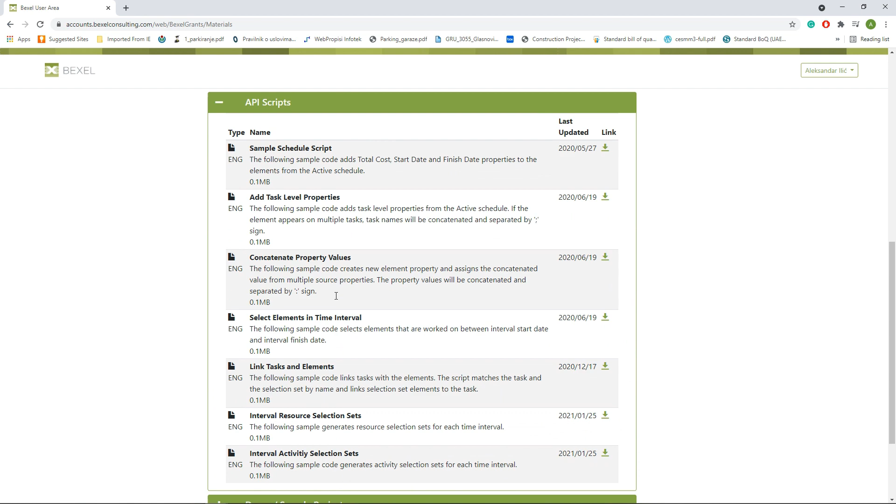All the way to demo sample projects, we offer 4 different types of buildings, of construction projects, from different authoring tools, of different types and different scale, and all of these projects are accompanied with detailed educational documents and step-by-step exercises that will help you learn your basic workflows in BEXEL Manager.

Besides this, there's also a Webinar Materials tab, where you can find exercise materials and models from previous free educational webinars, as well as exercise materials, models, and all import data for this webinar. And at the end, the Databases tab includes various classification systems ready for import into BEXEL Manager.

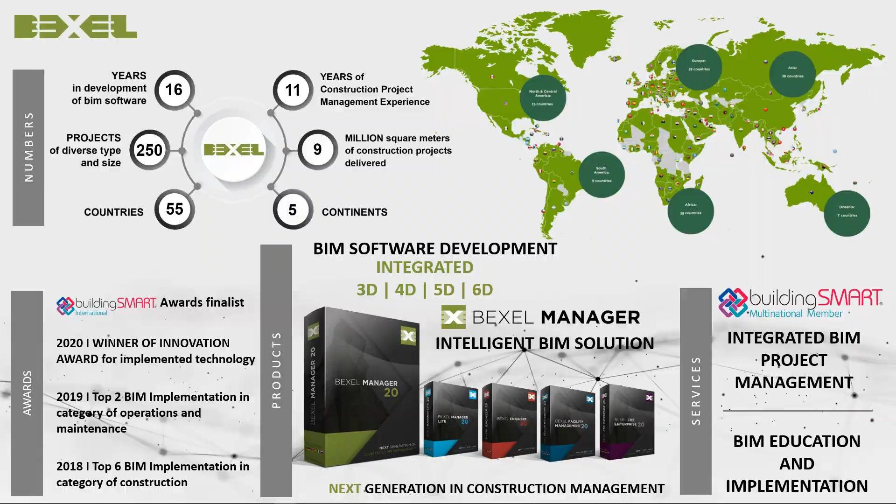Our software solutions and consulting services are used on numerous projects by big, well-known companies around the world, and we are proud to say that we gain trust from so many renowned clients. Last year we won an Innovation Award at buildingSMART annual competition, and we are very proud to be recognized as leaders in innovation in the field of BIM.

Just a brief explanation about our approach to BIM. BIM is often considered as a series of separate tools or processes specifically tailored for a certain part of construction management or for a specific project lifecycle phase. This often brings to a conclusion that BIM implementation is complicated, expensive, and requires extensive training and resources.

Because of this, we saw a need for a new approach to BIM implementation. We saw a solution in establishing BIM processes and a BIM platform in such a way to be open and adjustable for different requirements and project types.

We wanted to ensure that the core of the BIM model's role on the project is to be a reliable single source of truth for all participants, to encompass all relevant information on the project.

In order to succeed in this, we envisioned our platform as an integrated BIM solution that will allow you to manage your project through the whole life cycle, to integrate information from different phases and different stakeholders, and to focus on the big picture and benefit from an integrated project database.

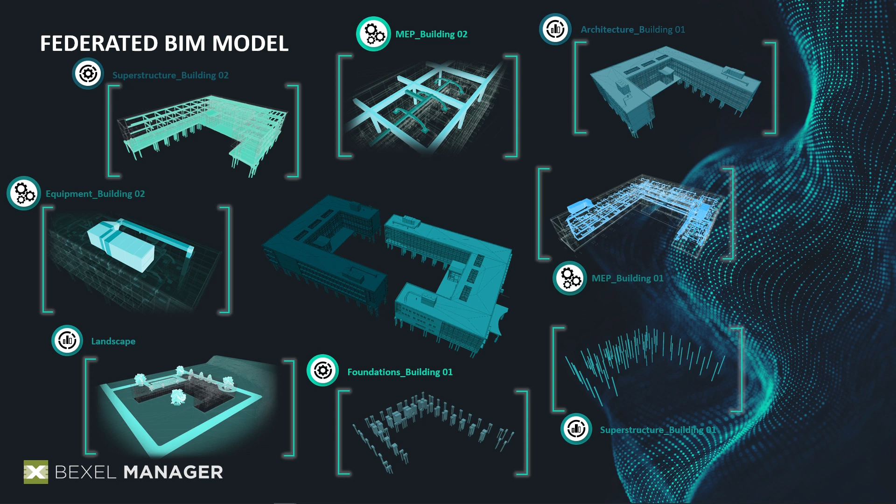Thankfully, the majority of software vendors today are dedicated to the Open BIM approach. In cooperation with buildingSMART International Organization for BIM Standardization, the open IFC format is developed and widely accepted.

We're gonna start our live demo with model federation. So basically we're gonna just create a new project within BEXEL Manager. We're gonna name it Demonstration Models. We're gonna name version V01 for our start model.

We're gonna choose multiple sources. Then we're gonna just select 3 IFC files, one for architecture, one for MEP, and one for structural works, and click OK.

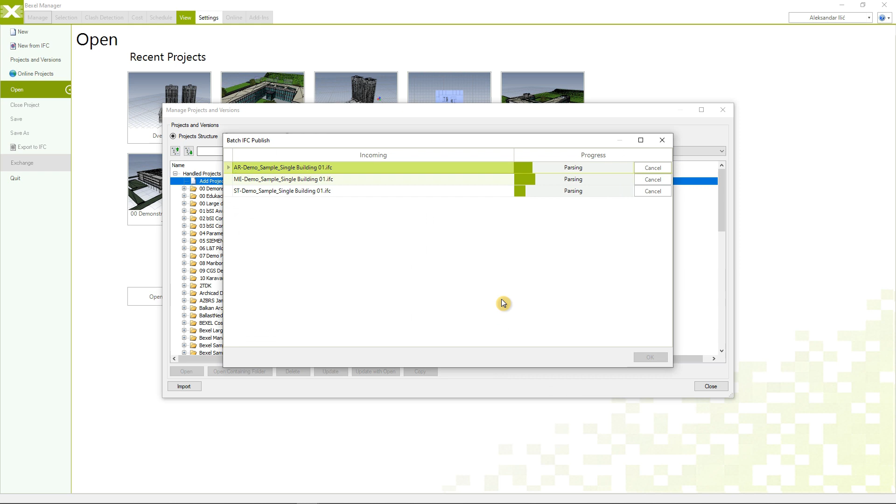The software will just merge them into one federated BIM model, including all the geometry and data layer of the said sources. Now we can open our federated BIM model.

We have established our federated BIM model. All different sources are now integrated into a single central BIM model.

But what makes the difference between a simple 3D model for visualization purposes only and a BIM model is the so-called information layer. So besides geometry, the BIM model contains an extensive data layer.

So the first step in federated BIM model preparation is to organize this information and prepare it for the next phase. First of all, we need to check the spatial and data structure of the model.

For this, in BEXEL Manager, you can use the Building Explorer tab. Here there are predefined model organization functionalities that will organize your BIM model by element category and family, spatial organization, systems, and workset structure. So basically you're able to control your model based on these predefined organizational schemes.

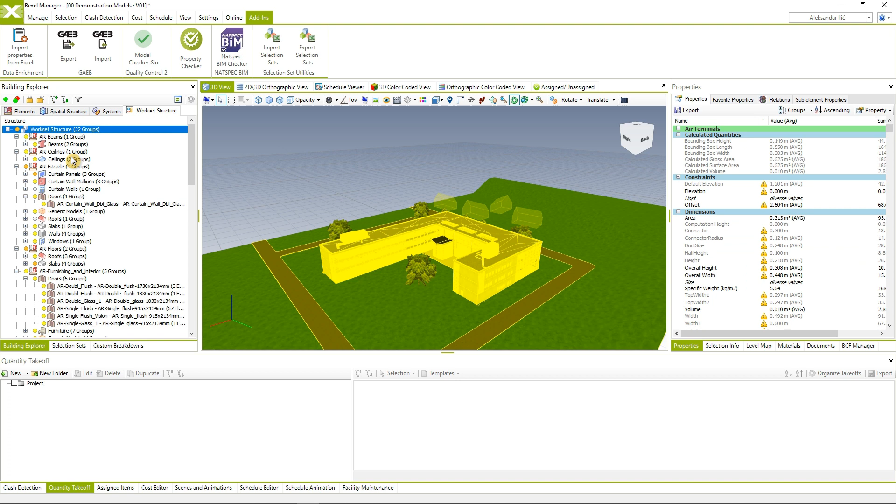So if we go quickly through these options, we can see what level of information we have and what is the basic structure of our model. But for a more detailed analysis, we would need more refined, more customized project organization.

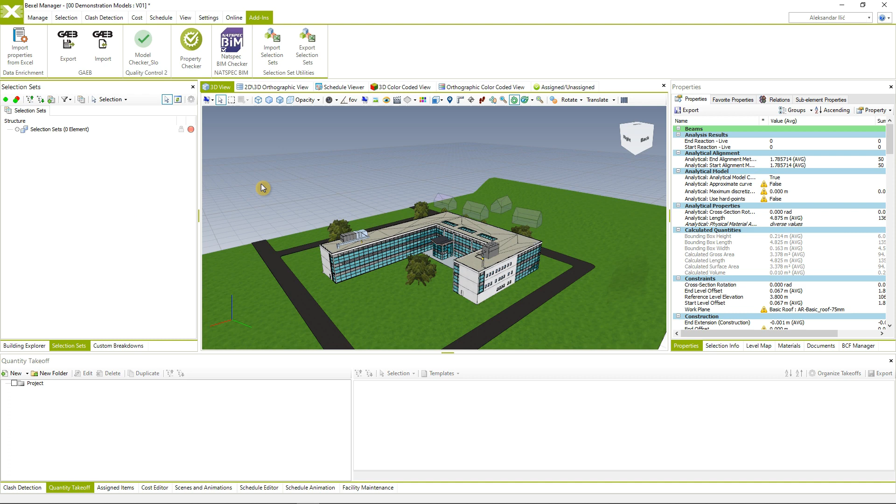And to achieve this, we can use selection sets. Selection sets allow the user to group and organize elements. So you can manually create groups of elements or use rules and define so-called smart selection sets that will group elements according to certain rules or properties.

Now we can see one simple example. So I can just select these few elements and create a test selection set. These elements will be actually stored in this selection set. Or I can create a smart selection set by simply defining the rule.

Let's say we're going to group all the elements that are of a certain category. Let's choose walls. And I can simply create the smart selection set.

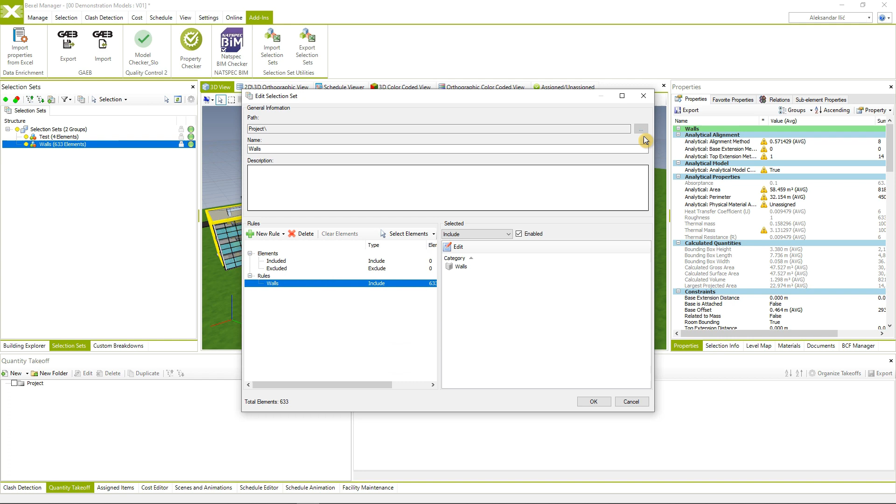The difference between the smart selection set and simple selection set is that even when you update the model, the smart selection sets will be updated according to the rules defined in the selection set.

But honestly, creating new customized selection sets for every new project is a time-consuming task, since if you think about it, rules of model organization and procedures are more or less something that can be predefined at the level of a team or at the level of a whole company, actually.

So this new feature of BEXEL Manager that we'll present today allows you to establish your knowledge base, a set of predefined templates for model organization and control that could be easily applied on every new project and exchanged between teams.

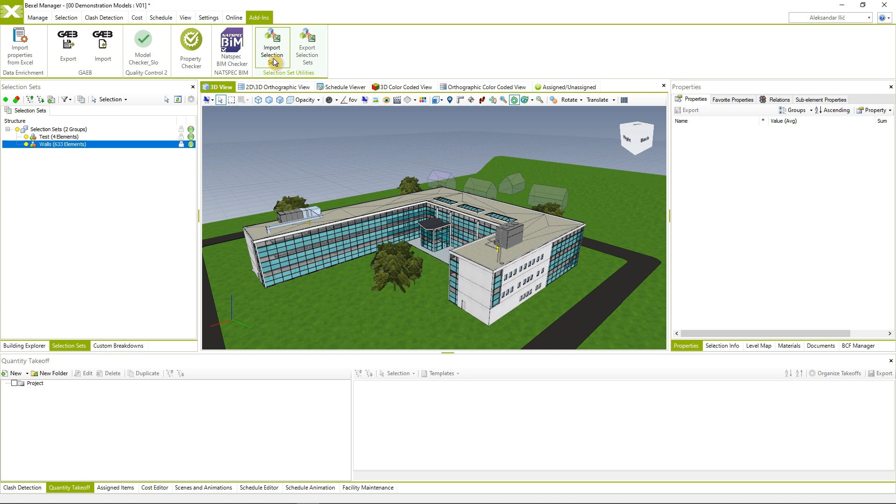With a simple add-in, the user is now able to import smart selection sets defined in an Excel spreadsheet.

Now we're going to present some examples. Since we have a start model without selection sets, we can start with model organization rules that will identify different sources. In this example, rules are established to identify abbreviation and source names - AR for architecture, ME for MEP, ST for structural, and so on - and automatically prepare separation of model elements by work packages based on the source file's naming convention.

Of course, the system is completely flexible, so you can set your own naming convention as well.

For detailed information about how to establish the rules and how to prepare the table for importing the selection sets, you just need to click on the help page and you'll find all the detailed information on what you have to do. Now we're going to import selection sets.

Okay, selection sets are now imported. As you can see, we can now control the model by simply turning off or on parts of the model based on the source name.

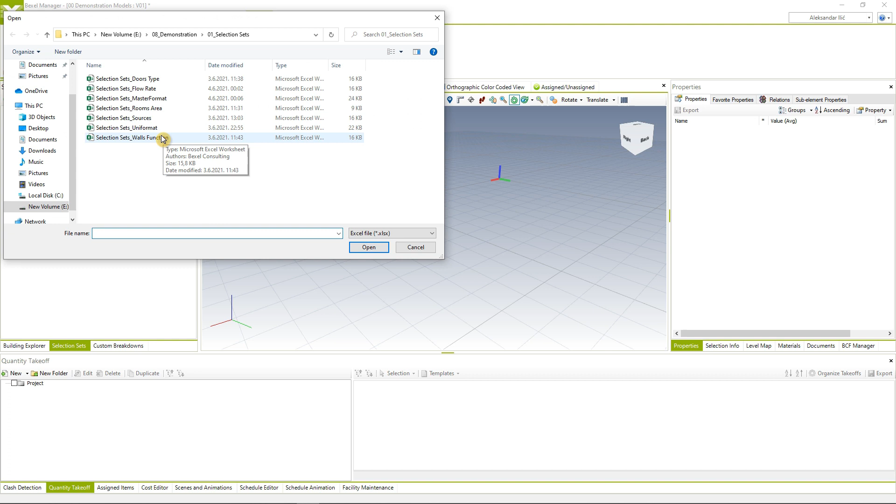There are also some additional simple examples like this one, which actually organizes the walls into bearing and non-load bearing walls. So you can separate the wall category elements by this specific property, and you can easily select them and distinguish them in the model.

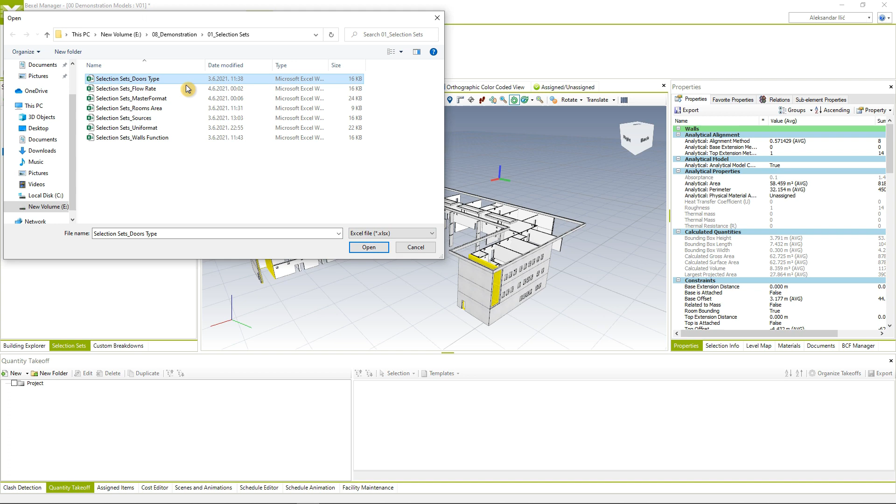Or another very interesting predefined selection set template, which organizes doors based on the property named swing direction. So basically you can set a selection set template that will organize all the doors on the project based on the property swing direction. If we isolate it, we can see that we can easily identify it.

It's not so impressive on this small scale model, but it could be very helpful in a bigger federated BIM model.

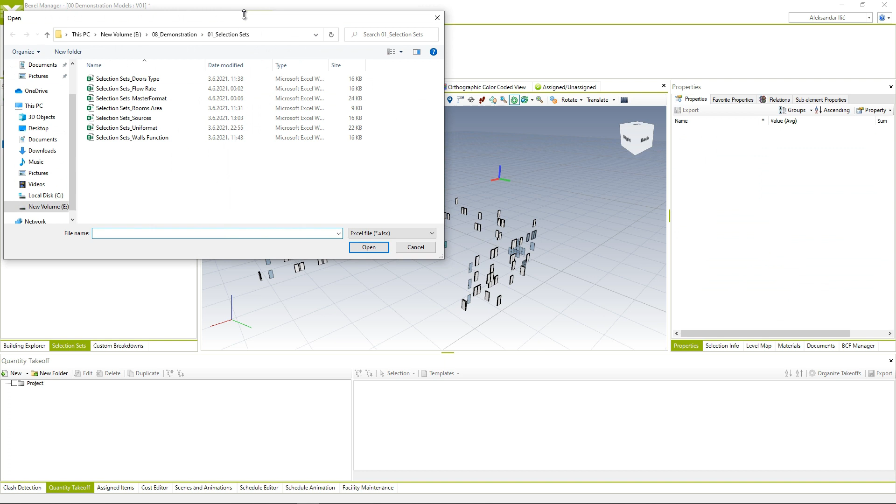Another interesting example is this selection set template, which organizes or sorts all the spaces in the model into groups by square meter area. It has a bit more complex rule, which includes the category and the area spaces range. So if we import it, we're going to see all the space elements or rooms in the model actually separated into groups from 0 to 10, 10 to 20, and so on square meters.

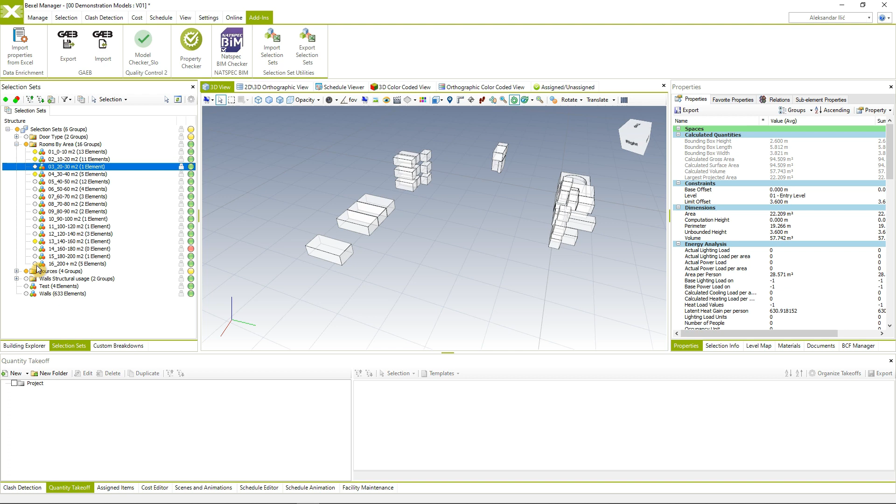So we can easily identify different groups of spaces based on their area.

And this is just an example of how this feature could be utilized for various spatial analysis and project control.

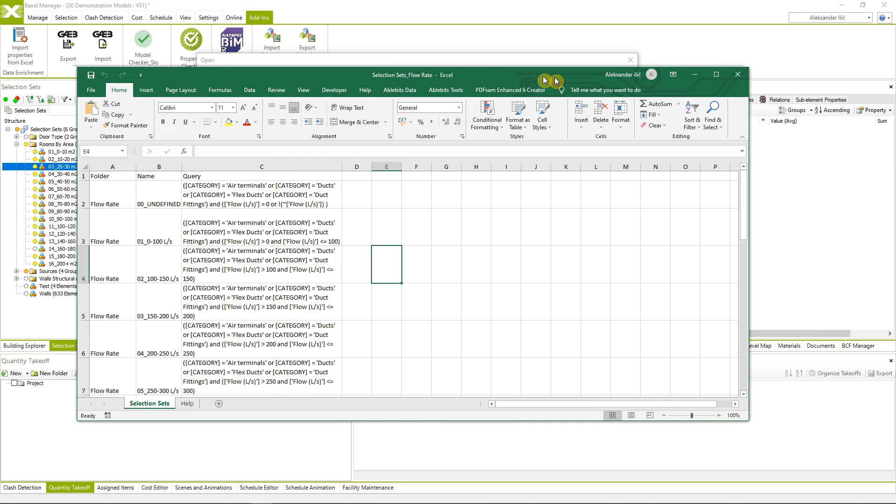Another template we have prepared here separates HVAC ducts by airflow rates, which means you are now able to organize your project elements even by discipline-specific properties, like in this case. This could be very helpful in the design phase, and also in the execution phase if we're talking about materials or specific technologies that have to be implemented, and so on.

Basically, you're able to use any property and any logic that is applicable to your workflow and to your way of approaching BIM model control and BIM model organization.

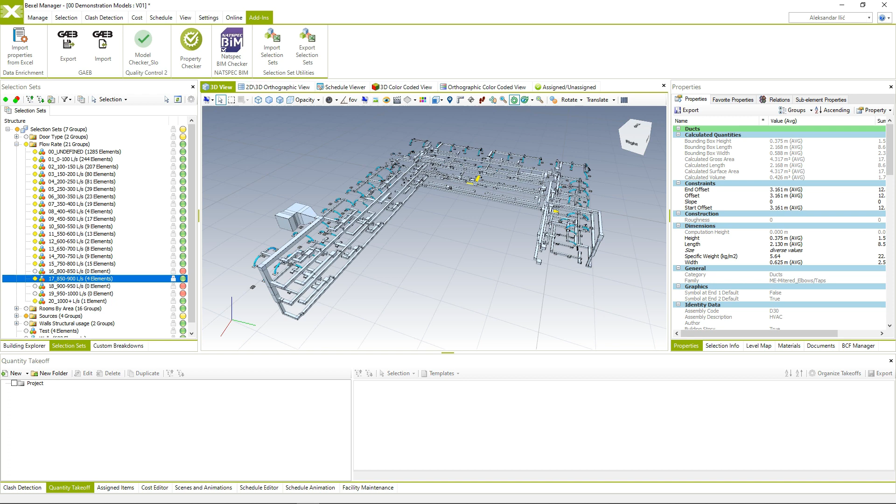So basically, this system gives you the opportunity to predefine and automate a great amount of manual tasks related to model control and model organization. These examples are just simple use cases of this feature, but you can probably find numerous applications for your workflow.

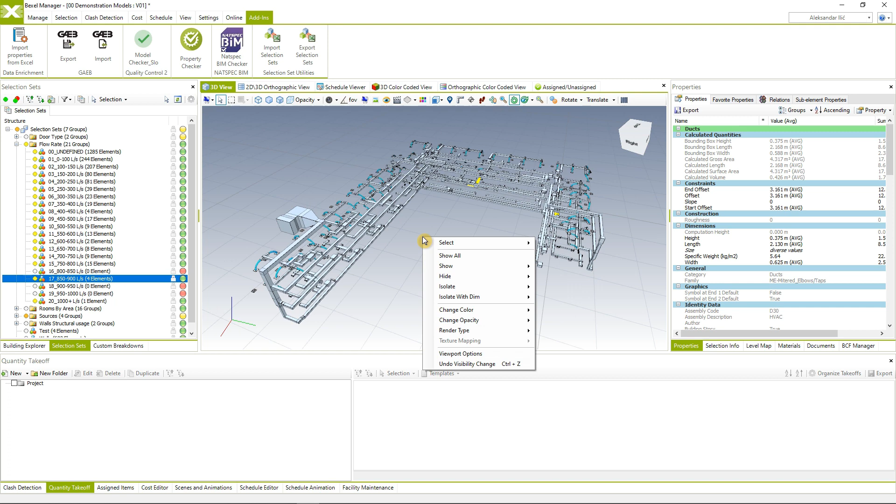So right now we have a certain level of model organization - we have the ability to easily identify groups of elements based on certain properties and rules - but for proper analysis we also need visualization of these organization templates.

For that, we can use the custom breakdown structures functionality. This feature allows you to automatically organize elements by certain rules and to color code them. So in addition to selection sets, you can even color code these elements.

So if we make a simple CBS for, let's say, building stories, we can color code different stories. We're going to name this CBS 'building storeys', check 'use selected elements', group it by the building level property, and set color coding.

Click OK, and we get a 3D color coded view of the groups of elements that are placed on different levels.

This could help us inspect the spatial structure of our BIM model and prepare it for further analysis. What we can also do further is create selection sets automatically based on the CBS created.

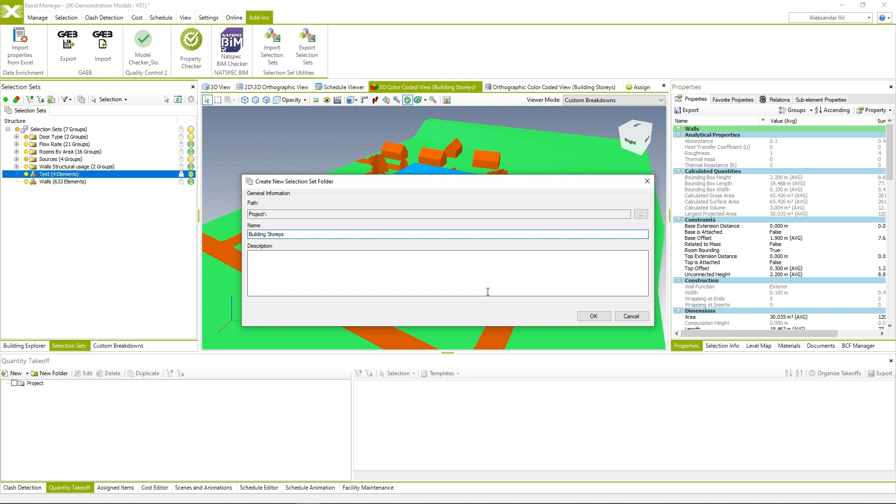So we're going to first create the selection folder for the building storeys, and then we're going to use the functionality called creation wizard.

Here we can choose two possible options: we can choose the elements from QTO or all elements. By all elements, we're going to create smart selection sets with the rules from CBS. That means when you update the model, the selection sets will be updated as well.

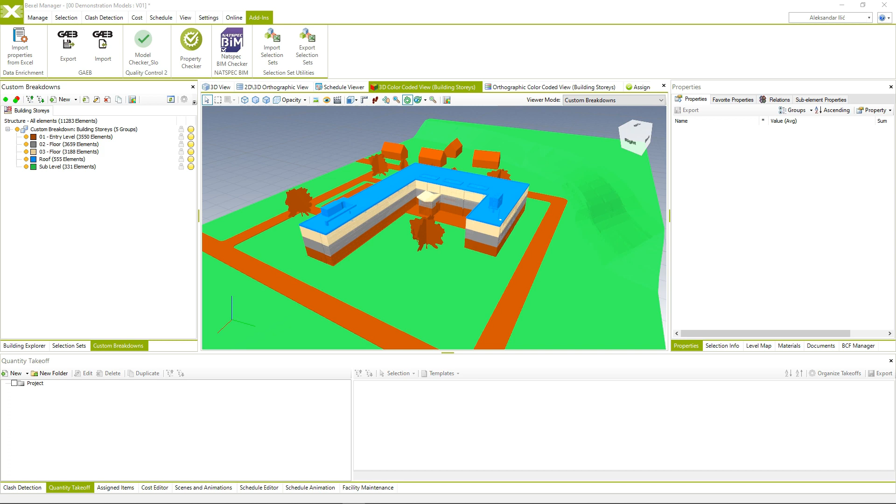If we look at this particular example, the coloring scheme of the analysis is probably not relevant to the user, because you just need to see the difference between two floors, not specific rules for coloring certain floors. But let's say we have a standard color coding system for MEP systems, rooms, or materials. All these rules and procedures could now be integrated in BEXEL Manager through import template functionality.

This means you're able to set a certain color coding rule, save it as a template, and use it on the next project. So now we're going to see a few examples.

Let's say that an MEP system color coding template is present, meaning you have a certain standard for how you color code MEP systems on your projects. It colors different system groups according to predefined standard rules. Such rules could be defined at a company level, team level, or could be part of market requirements.

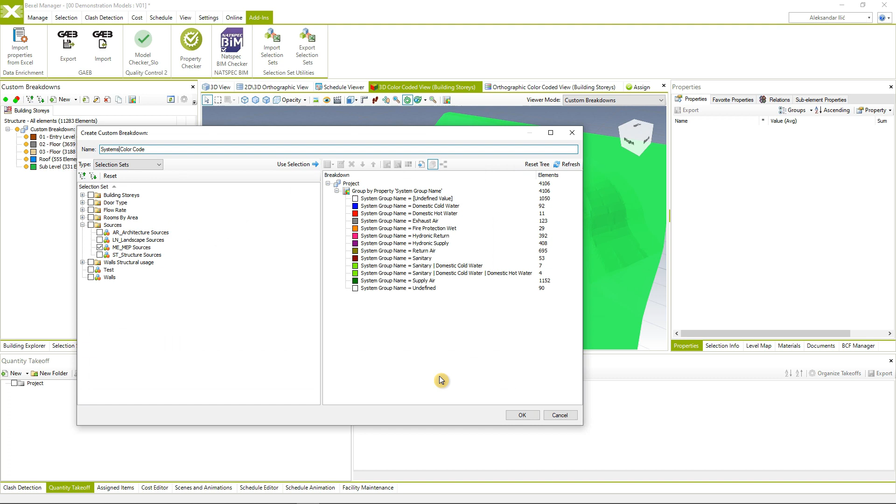So basically, we can simply create a new CBS. We're going to name it Systems Color Code, and identify the source for MEP works. Use selected, and then we're going to import a template. You can import a CBS template which defines according to which property we're going to sort the model elements, and also defines which color will be assigned to which property value.

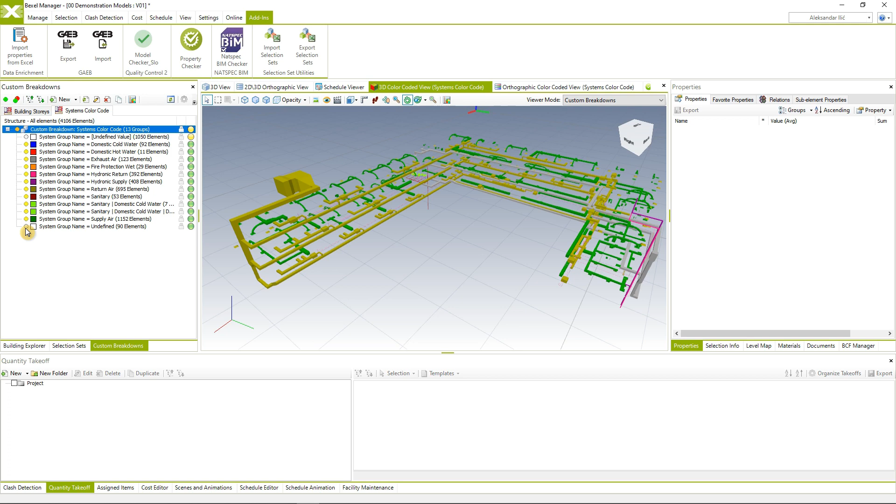As you can see in this model, we have a lot of elements that don't have a defined system property, and they are colored white. Cold water is colored blue, hot water is red. We have different colors for supply and return air in the HVAC system, and different colors for hydronic return and hydronic supply lines in the HVAC.

So basically, we can easily transfer our standardized scheme for color coding for MEP systems from project to project. We can easily predefine it and use it as part of our workflows.

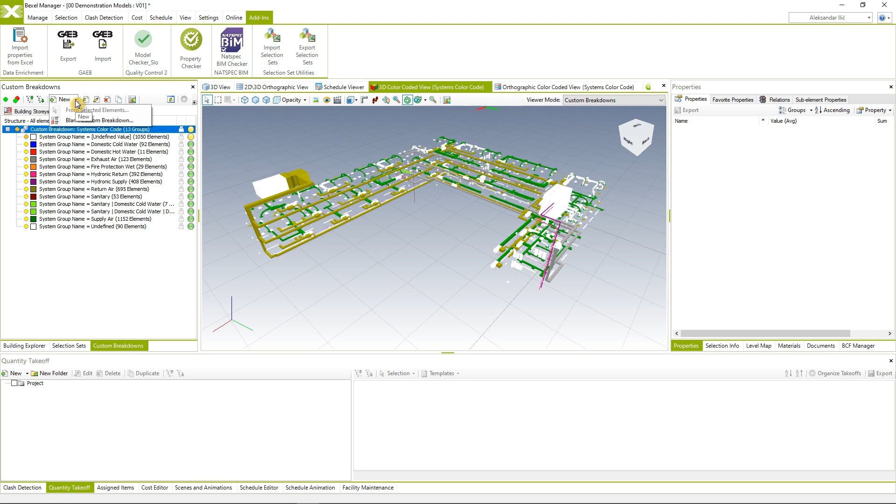We can also further utilize imported predefined selection sets that are sorting rooms by area, let's say. So we have imported the selection sets that sort rooms by area, but we also have a CBS template that will color all these groups of areas based on the property area.

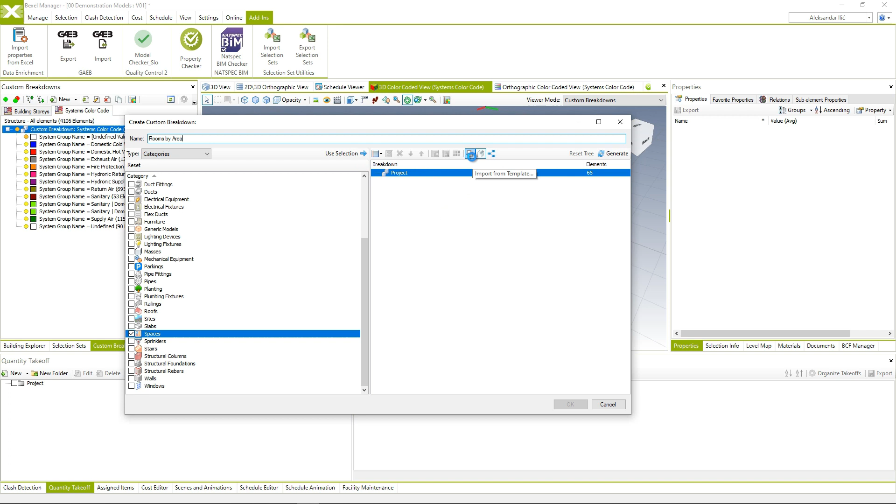So we can now import the template and show how it looks. You can easily analyze any of your projects based on these selection sets and predefined rules and color coding sets. If we turn on the areas and isolate the elements, we can see in more detail how this CBS works — we're practically having the visualization of our selection sets that were prepared and imported previously.

Another example is color coding for spaces in the model based on their name or function. So we can define the color coding for different types of spaces in our model, and we can create this CBS from a template and have this color coding equal on the same project.

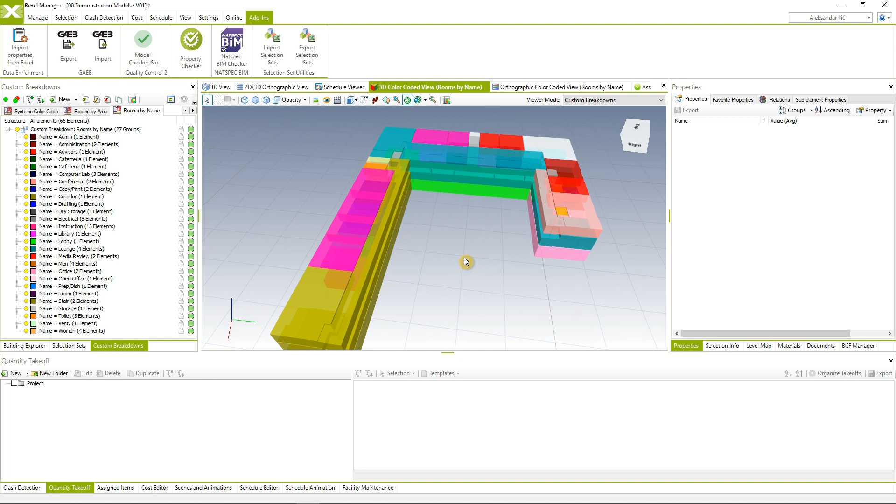Of course, this means you would probably need to have a predefined naming convention for your spaces, but that is something people definitely have in their companies. So having a color coding system or selection sets predefined and based on these naming conventions and standards will save you a lot of time in organizing and checking your model elements.

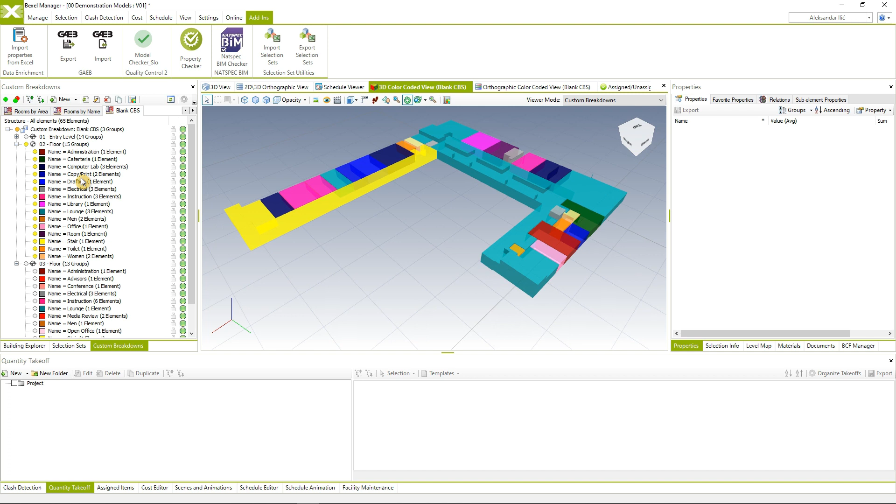I'll demonstrate another variation of this template, which will sort spaces or rooms in the model by name, color coded, but also by floor. So we are now able not only to see color coded spaces based on their function and name, but also see it by level. We can see that certain functionalities have certain shades of color and are grouped together floor by floor, so we can easily inspect the functional organization of our project.

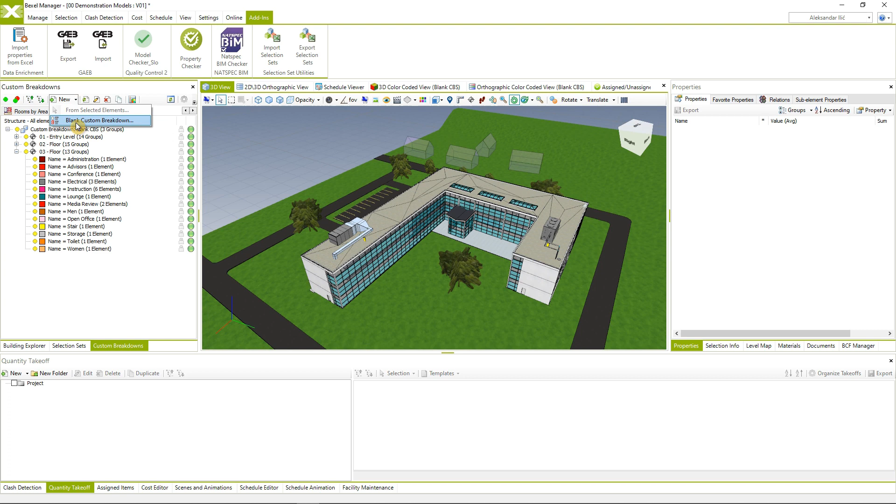Now we're going to change visual properties of the model to prepare for the demonstration of the next example of custom breakdown features, which will include MEP elements. This one is also interesting — we can color code HVAC ducts based on airflow rate parameters.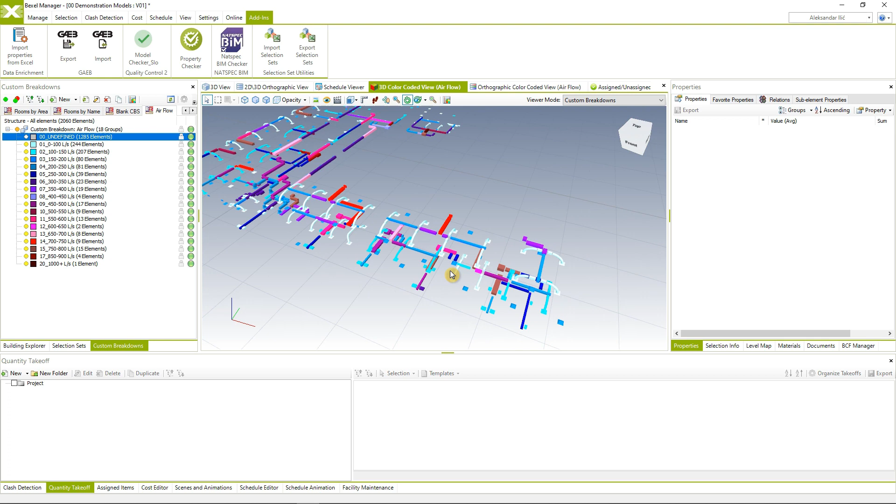So basically we have prepared a color coding system that will color code areas with higher pressure in certain colors, and areas with lower pressure in different colors, so you can make a lot of different analysis based on this knowledge base. After we import the template, we can see that we again have certain elements that don't have identified value. So you can right away see how this CBS template can help the user start the quality control process of the model.

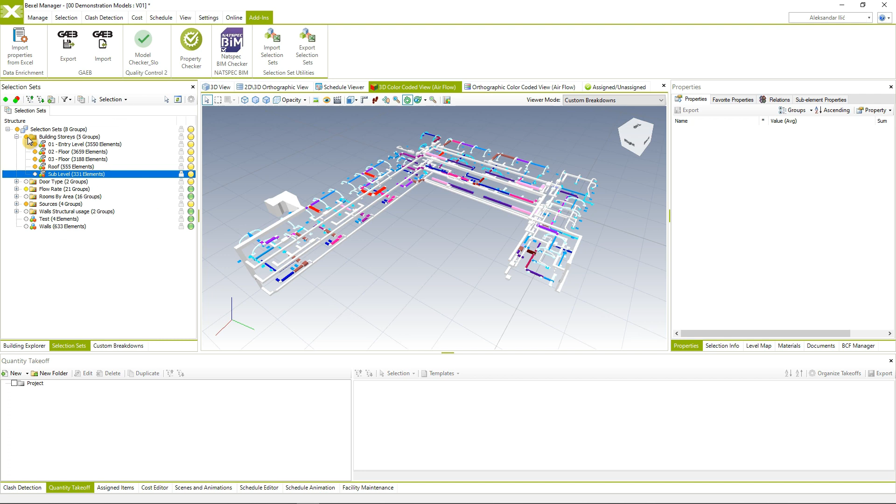To easily identify and visualize elements that don't comply with certain rules defined within your knowledge base, you can easily visualize the data layer of the model through the 3D representation. This could be very helpful in different situations in the design or construction phase of the project. As with selection sets, possibilities for application are limitless and could allow you to optimize your model organization and control your workflows in the best possible way.

Of course, the main advantage of such an approach is that you're able not only to establish and use your knowledge base on your projects, but you're able to enrich this knowledge base and exchange it between projects. So right now we're going to try to demonstrate how you can create a custom breakdown structure and how you can transfer it to another project.

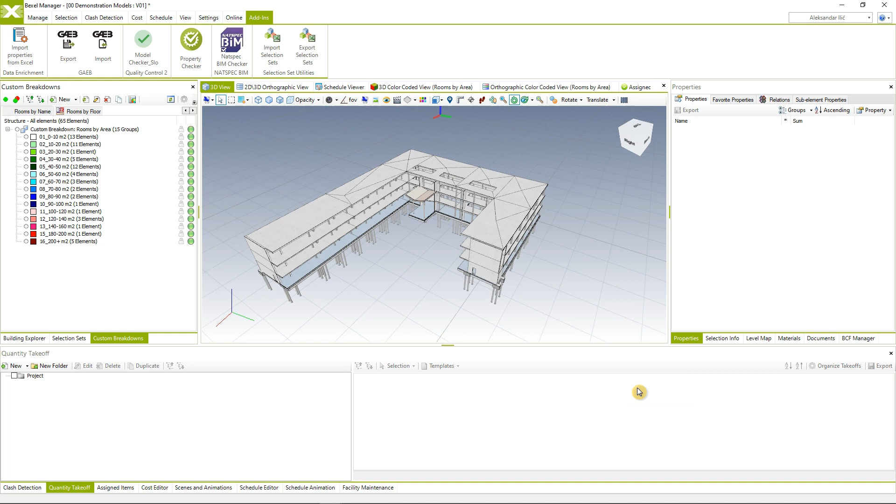Let's create a simple custom breakdown structure for structural elements. We're going to use structural sources, and we're going to name it ST category. We're going to organize and just group elements by category, add color coding. Now we're going to get all the elements colored in a certain way based on their categories.

Right now we're going to modify the color coding scheme. We're going to simply choose different colors. We're going to choose red for the beams, green for the masses. Roofs are going to be colored in orange. Slabs could be in dark blue. Structural columns could be purple, let's say. We can just add some random coloring.

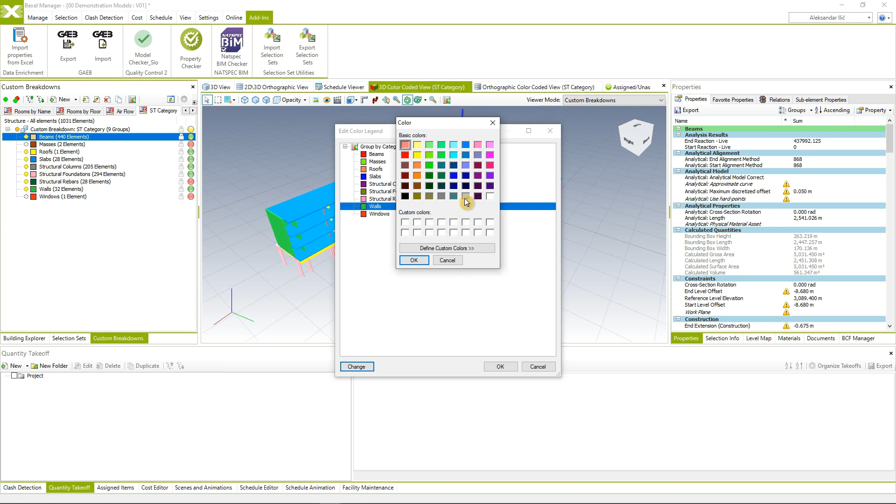Just to show you the point, this could be light blue, and windows. So now we have set our color coding scheme in this model, and what we can do now is transfer it to the next project. How can we do it? We can do it in two possible ways.

We can actually save a template. It's going to be a new CBS template, structural categories, let's say, and then we can import this template to our next model, or we can do it via exchange. That means we can directly export custom breakdowns to another project.

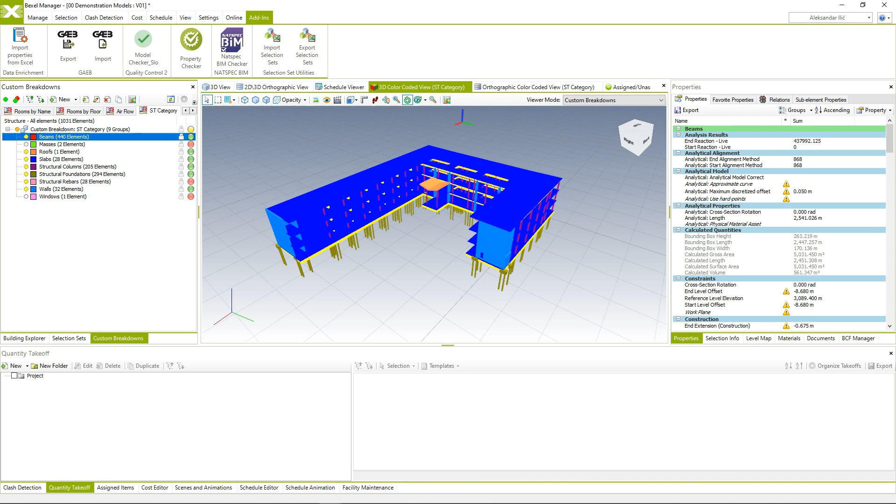So we can just select the custom breakdown. We're going to name it ST categories and click OK. Now we're going to open our second model. It's a different type of building, a high-rise building, and now we're going to just use the exchange function to import our CBS file.

We're going to click open and check custom breakdowns. The custom breakdown is succeeded, but as we can see, the custom breakdown doesn't have any elements, and this is okay because we haven't specified which elements should be included in this custom breakdown in this new model.

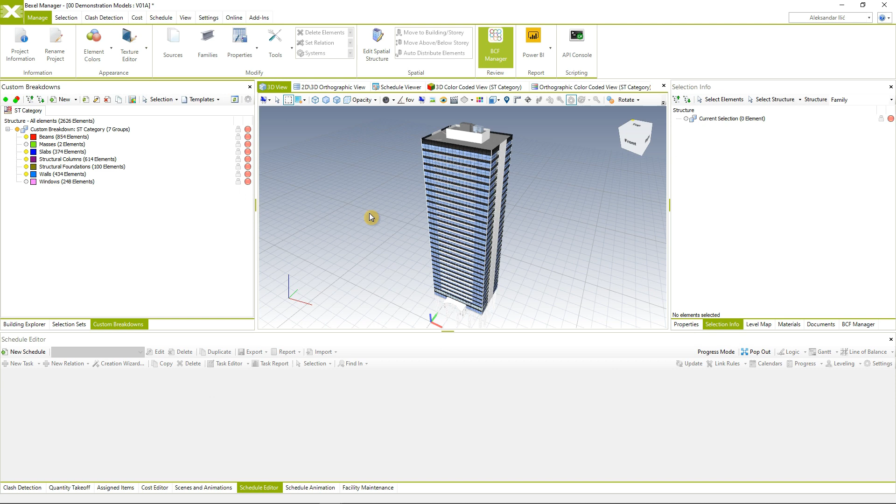So we're going to go to edit, and we're going to find selection sets and find structural source as we used in the previous model, and we're going to see that the color coding is similar to the previous model. We're going to click OK, select and isolate elements, go to the 3D color view, and there it is — it is colored according to the CBS coloring scheme that was set in a different model.

So this is a great tool to enrich and exchange your knowledge base between the projects.

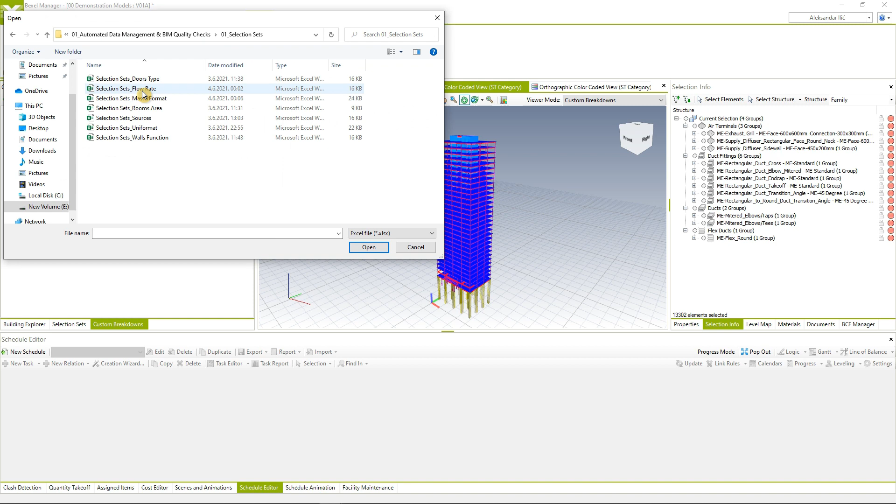So besides this basic CBS transfer, we can also see how our selection set import and CBS template work on a different model of a different scale. We're going to now again import the selection set templates that we were using on the smaller model. We're going to use rooms by area selection sets — let's check if it's imported — and we're going to use a flow rate selection set template as well.

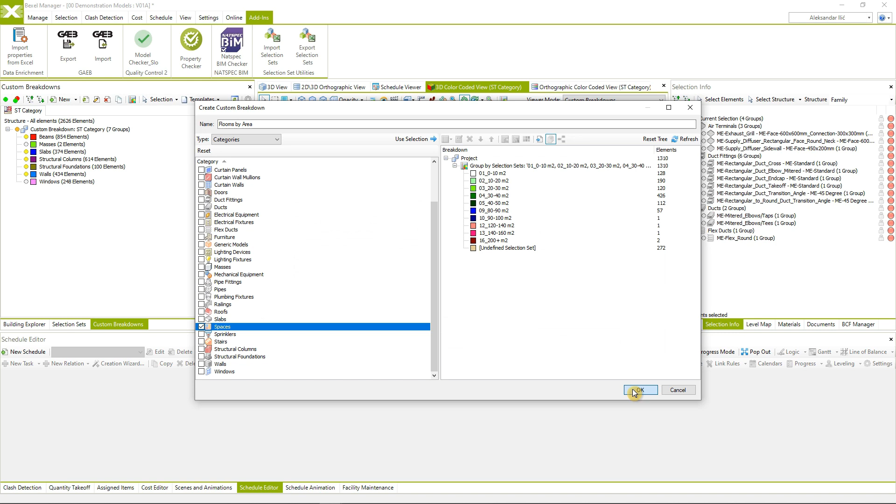Then we're going to try to create the same CBS templates. So first let's make rooms by area. Again, we're going to select spaces as the only category to be taken into account. We're going to import the template for rooms by area, and if we click isolate the elements, we can see that the spaces are sorted and colored the same way as in the small scale project.

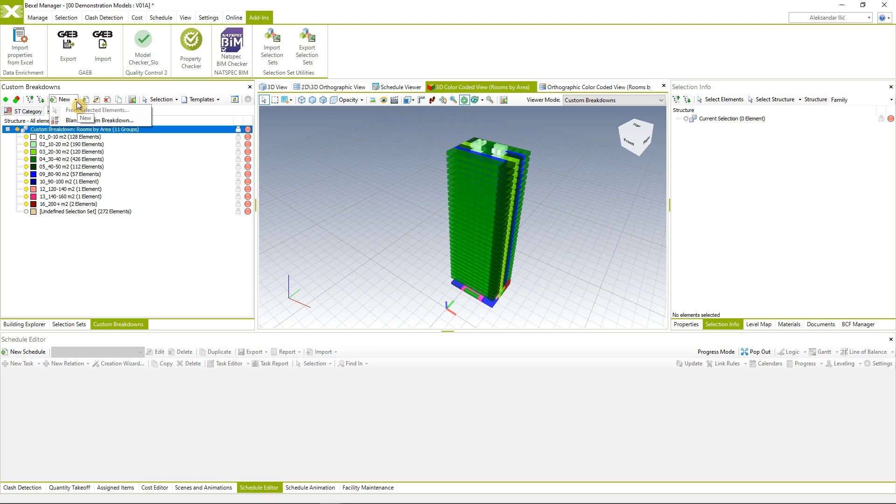We can also test it for, let's say, room name by floors. So we can repeat this — let's call it rooms by floor — and repeat the same CBS template. We're going to see that the coloring scheme is again the same as with the small scale project. If we collapse, we see that this building has about 30 floors compared to only 3 on the original model, but the color coding of the spaces is unchanged. No matter that you have a completely different project, the logic behind it is the same.

And for the end, let's just try to recreate the one for the MEP systems coloring CBS. So let's just choose MEP source, and let's call it systems CBS, and let's try to import the proper CBS.

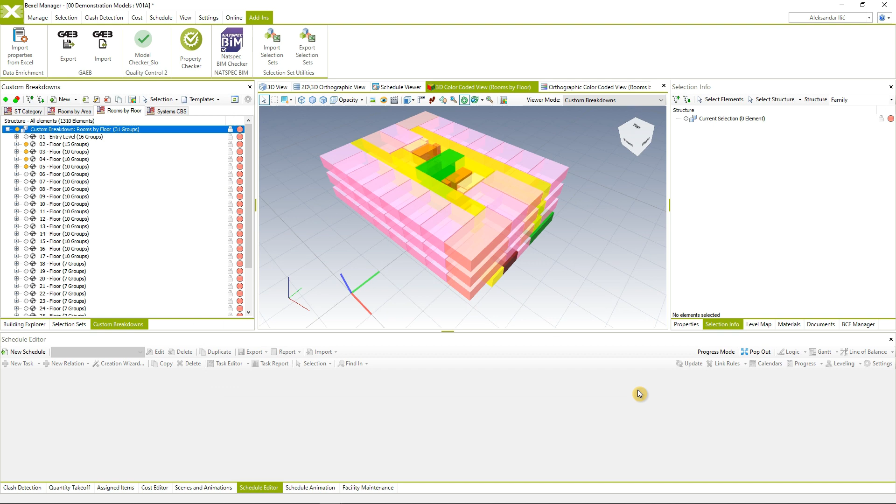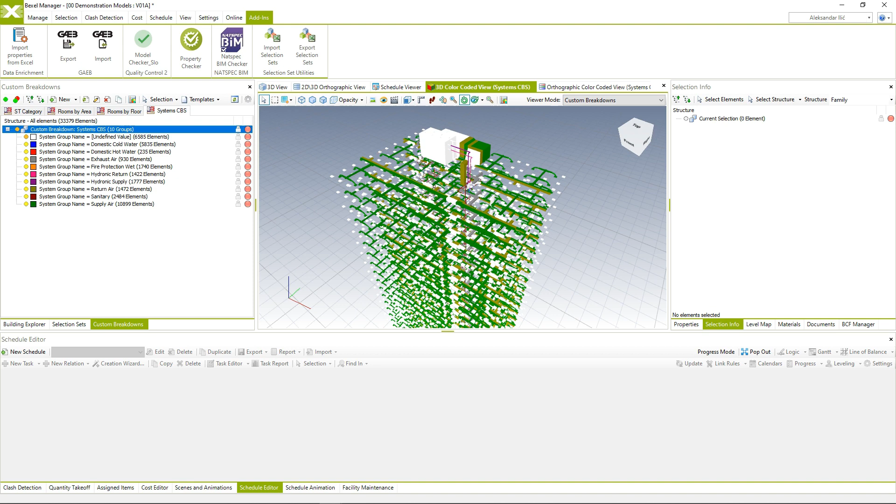Click OK. And if we isolate selected elements, we're going to have the same organization logic as in the small scale model. So if we go back to original model, small scale model, and go to the system CBS, isolate elements, we're gonna see that we have the same coloring scheme as on the new project. So the same systems are colored in the same manner. That means that you can easily have your standardized workflows and that you can just have all these templates ready for every project to come.

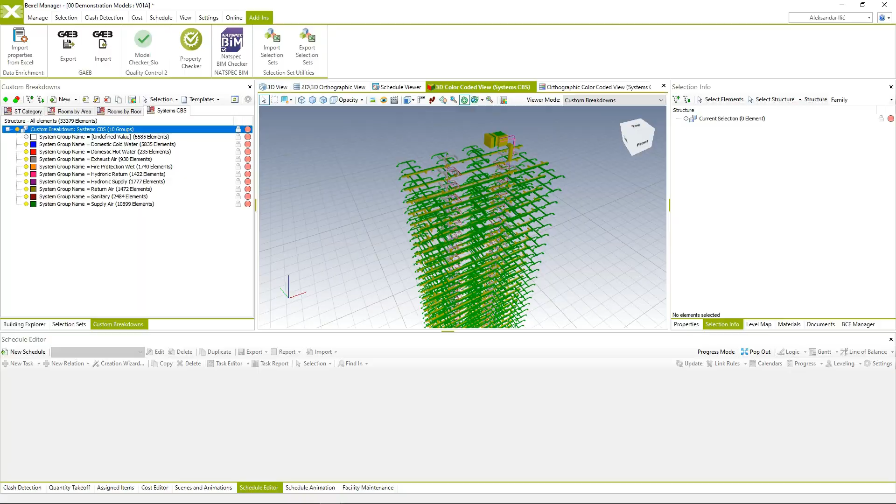So predefined selection sets and custom breakdowns are useful tools for model analysis, but for detailed project control, this is not sufficient. The sheer scale of data that has to be processed is just so big that it is almost impossible to do that manually.

Because of that, the best way to ensure data quality of a BIM model is through an automated data validation process. Data management and data validation in BEXEL Manager are performed through a series of open API add-ins available for download, but besides available model checkers, with a small effort in programming, users are able to configure customized add-ins tailored for the needs of a specific project, specific market, or specific legal requirements or company-specific checks.

So the basic principle behind the data validation module in BEXEL Manager is that the user can establish rules or data sets that should be populated in the model in the form of an Excel spreadsheet, open these rules or this checklist in an add-in or API engine, and the user will get a series of selection sets with all the elements that don't comply with said rules.

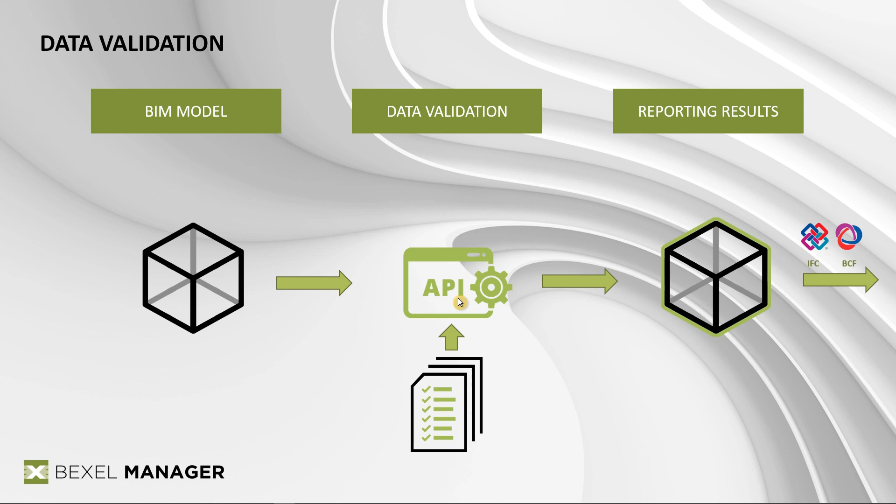Going back to the BIM model to see how the add-ins for data validation actually work. You can again select and isolate the part of the model that you want to check in your add-in. We have a wide range of different add-ins. Today we're going to check the basic property checker add-in available here.

We're going to open the checklist where we have defined our rules. The checklist is basically just a simple Excel spreadsheet with a series of separate sheets for separate data sets. On the first one we have 5 distinct project phases. Those will be used to define the amount of properties that should be populated in the BIM model based on the detail level of that phase.

So in concept design, it's going to have fewer properties than in design development. Then in issue for construction, it has more properties than in design development, and for as-built and facility maintenance, it's going to probably need some additional properties that are specific for the operations of the building. And just to underline, the number and names of the phases is not limited, so the user is able to customize it according to the needs of the project.

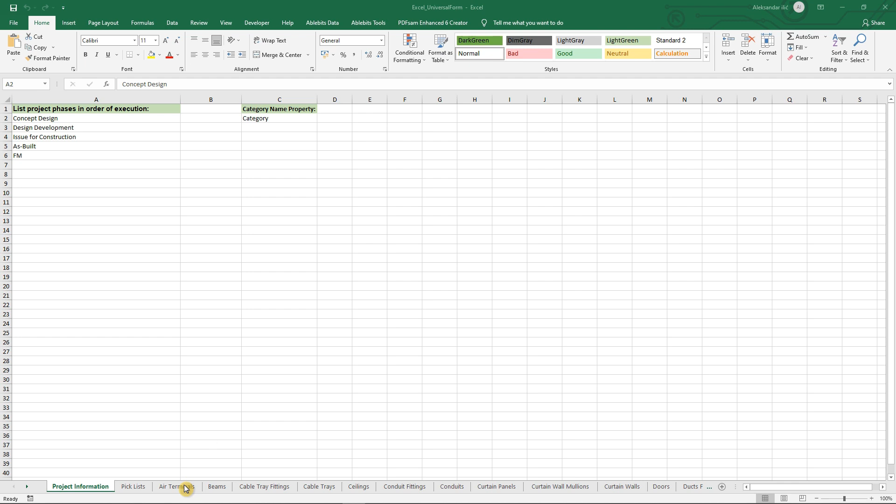Besides this, we have a series of sheets that are named according to the categories of BIM model elements, and for every specific category we have a series of properties that should be defined in a certain way, that should be placed in a certain property set, that should have a certain value type, and that should be populated in a certain phase of the project.

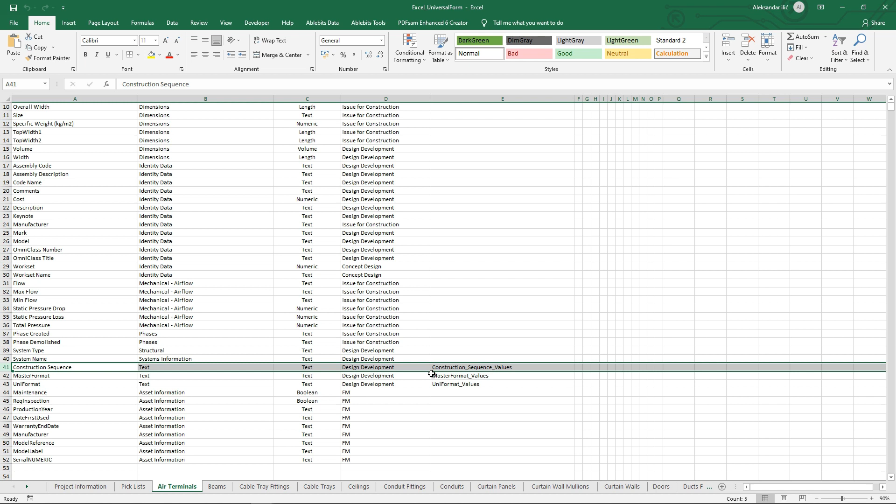And besides this, we also have a fifth column that is called key, and that is defined only for some specific properties. This column defines what are the possible valid values for certain properties. What that means is that if we have, let's say, a construction sequence property, it should be defined only in the range of these values here. So it could be only specified like this. We have the same for the space naming. We also have the specified values for the Uniformat and Masterformat coding system.

So based on these property sets and these parameters, our data validation engine will check if there are elements that don't comply with these defined rules. So if we click open, the Excel spreadsheet will be loaded. We can choose the phase, one of the 5 defined in the document. We can choose if we want to check only selected elements or all elements from the project. We can just click run.

We want to use only selected elements because it limits the time needed for the model check to be performed, since it depends on the number of properties and number of elements selected.

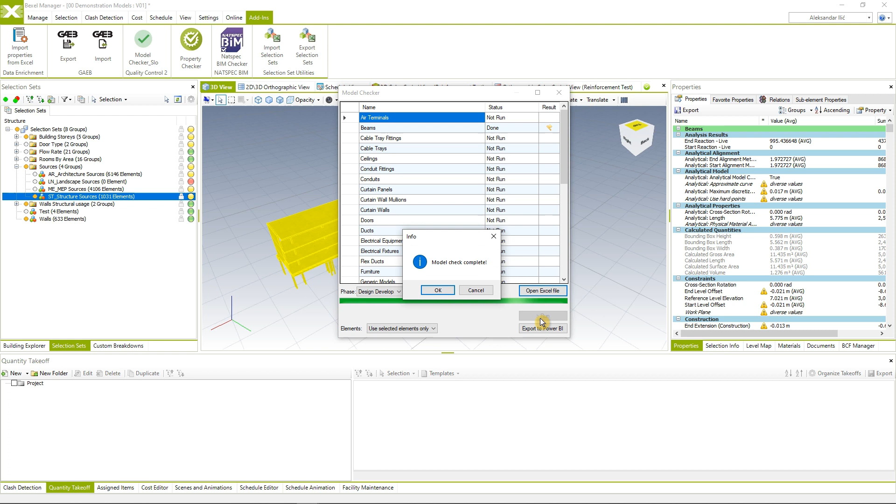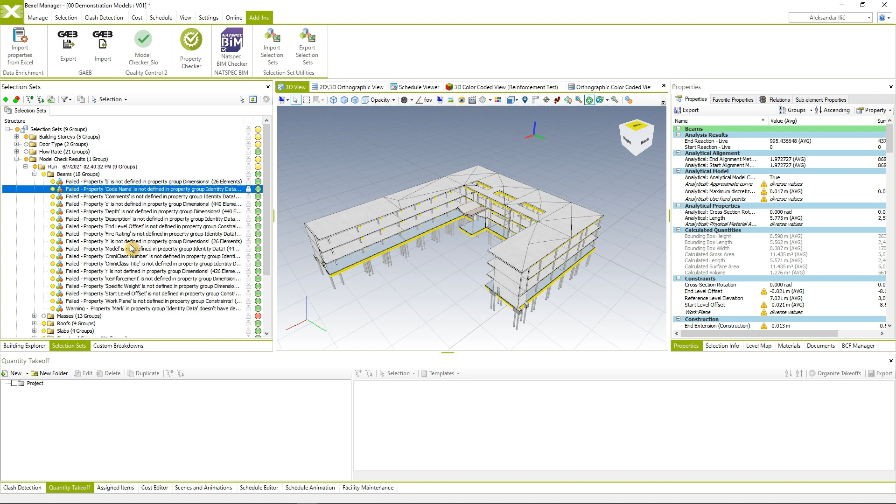The model check was completed for all structural elements, and now we get a series of selection sets sorted by model categories, since our properties were defined based on model categories. For every property that failed, there's a specific selection set named after the failed property, with detailed explanation of which rule it failed to meet.

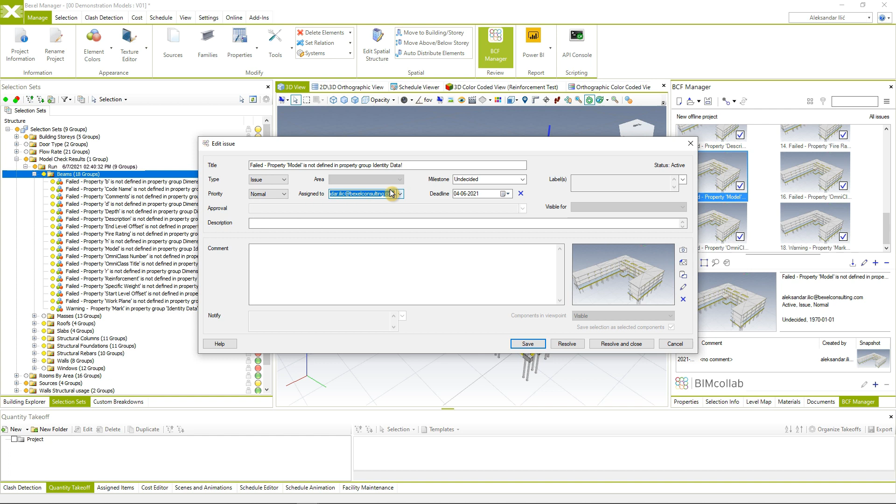With a simple drag and drop command, we can create BCF files out of these selection sets and exchange them with any OpenBIM BCF-supporting platform. The user can open every specific BCF to define the deadline, the type of issue, add a description or comment, define priority, and assign the person who needs to solve the problem. After saving, you can send this BCF file via a platform like BIM Collab back to designers to solve the found problems.

Besides results in the form of selection sets, there's also the possibility to export data into a PowerBI report. We're going to name it 'model checker results' and click save.

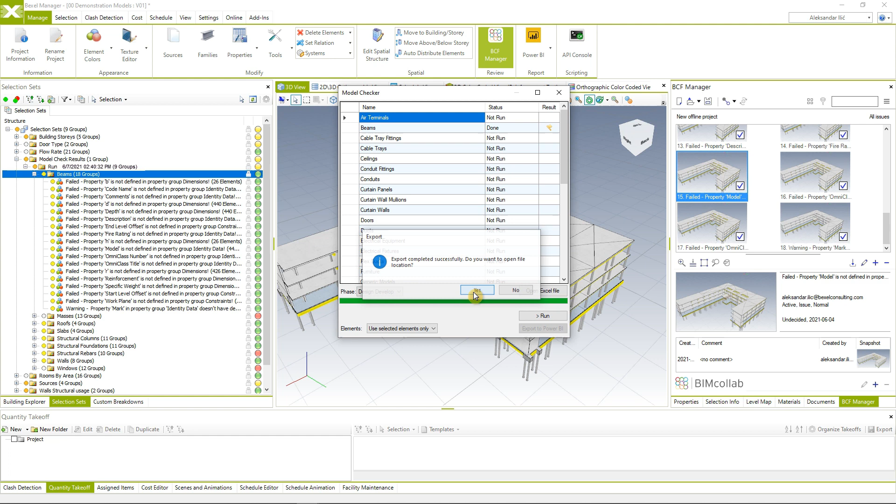The add-in will perform some additional analysis and export data into a PowerBI template, where you'll have a detailed analysis of all the clashes and statistics about the percentage of errors and percentage of well-defined properties in the model.

If we open the file in PowerBI, we get an empty template. We just have to refresh the data to update it with the latest exported data from the latest check, and after updating, we have a complete detailed analysis of our performed data validation process.

In this standardized dashboard, you can see basically a health check of your model. You'll have information about total required properties, total proper value type properties, total entered properties, what is defined properly, and what percentage of values come from pick list properties.

On the left side, you have the ability to filter by the category of the checked element, and on the right side by the property from the performed check.

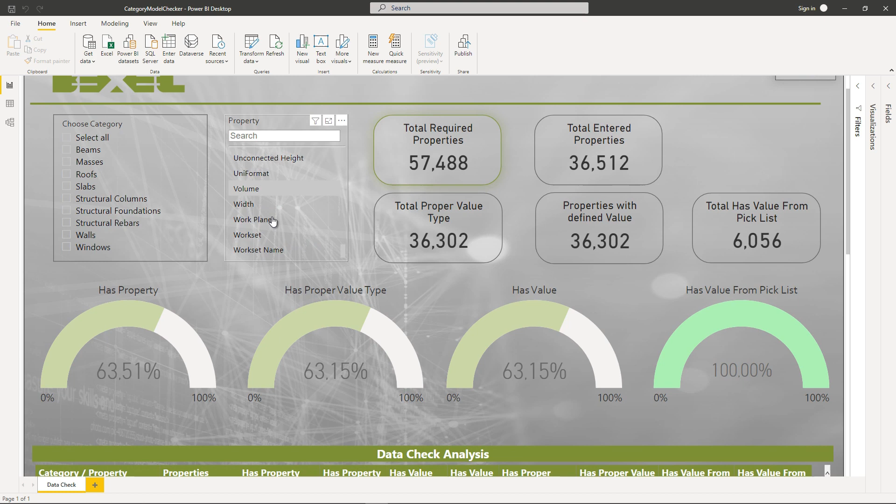Below, you have a detailed table for all the properties and categories, defining the percentage of completion, which properties are missing, and color coding it based on the percentage of properties entered.

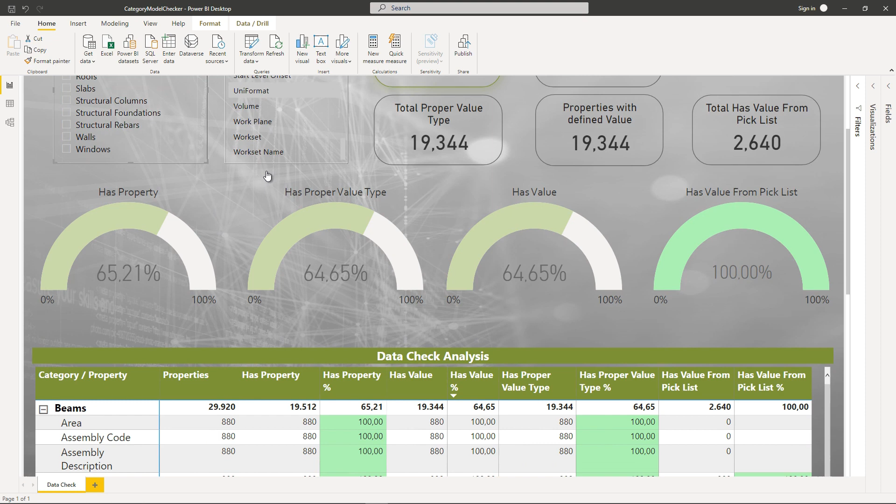It's a very detailed analysis that can help you health check your models and present it easily to other stakeholders. You can filter by category, by type of property, and have an interactive look at all the properties of the model.

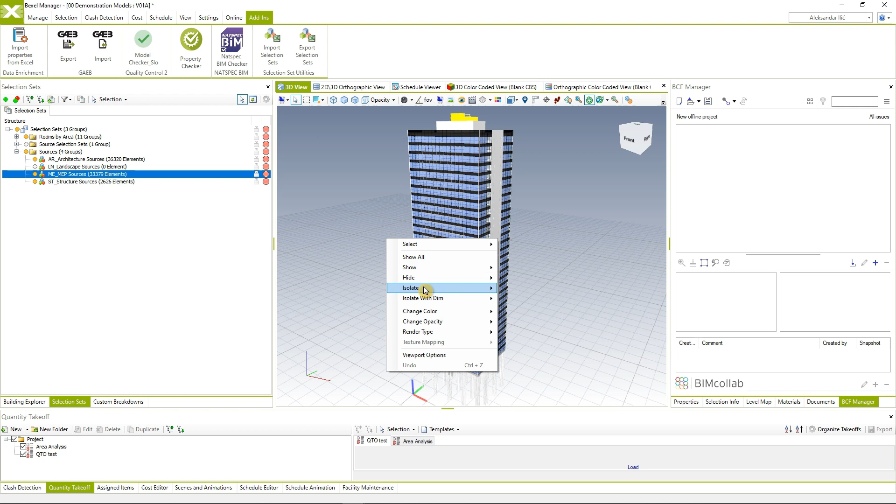We're moving back to the large-scale model to see how the data validation add-in works on a larger scale. This time we're going to select the MEP source of the model, isolate the selection, and perform a data check on the MEP part of this large-scale project.

The procedure is the same. We'll load the same checklist, which has the same five phases and the same list of properties. In this case, we're interested only in MEP properties since we're checking only the MEP part of the project, and the values of the properties are the same as in the last check.

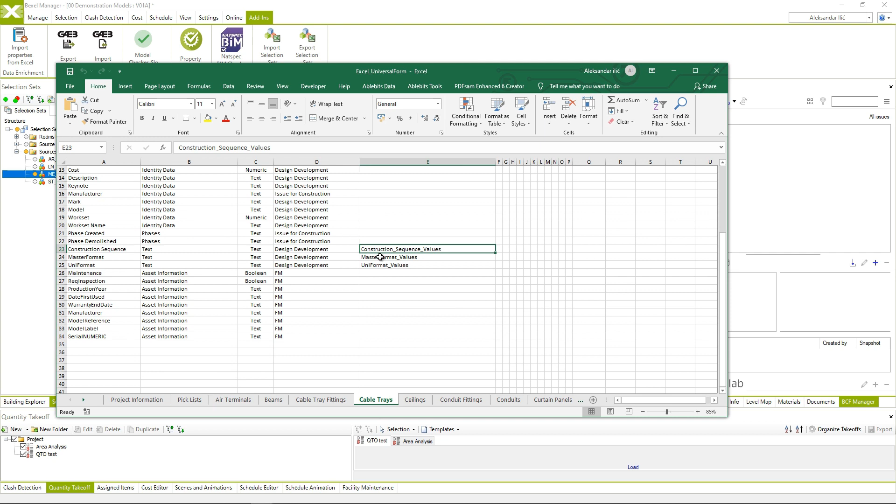The only difference is that right now we have different categories of elements, and a much larger validation process since it's aimed at a much bigger number of elements. We'll use the same phase as last time, use only selected elements, and hit run.

This time we have to expect the checking process will take longer because we have a much larger model with a bigger number of elements and more properties to check. Depending on your hardware, it could take even a couple of minutes to complete a check of this scale.

But when we see the final number of checked properties, it's clear that manually it would be virtually impossible to perform such an analysis and validation process.

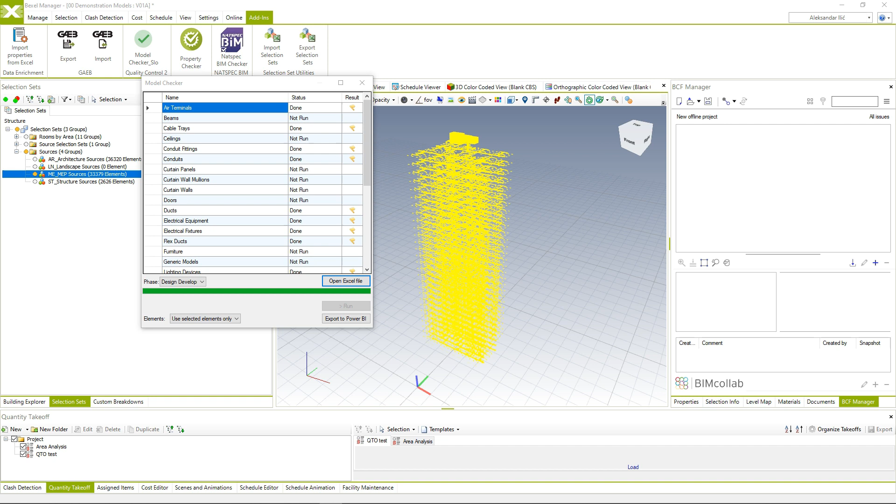Our validation process is complete. We got the model check results in the form of selection sets. We can easily identify the groups of elements with failed properties, navigate in the model, and see which elements have specific problems with specific properties that failed. We can drag and drop to create BCF files and send them to other stakeholders on our project team.

As in the previous example, we're going to export a PowerBI report to see in more detail the status of this model in terms of data health check, or to see what percentage of the model has properly populated data layer. So if we open the PowerBI template, we'll have to refresh the data to get the latest results.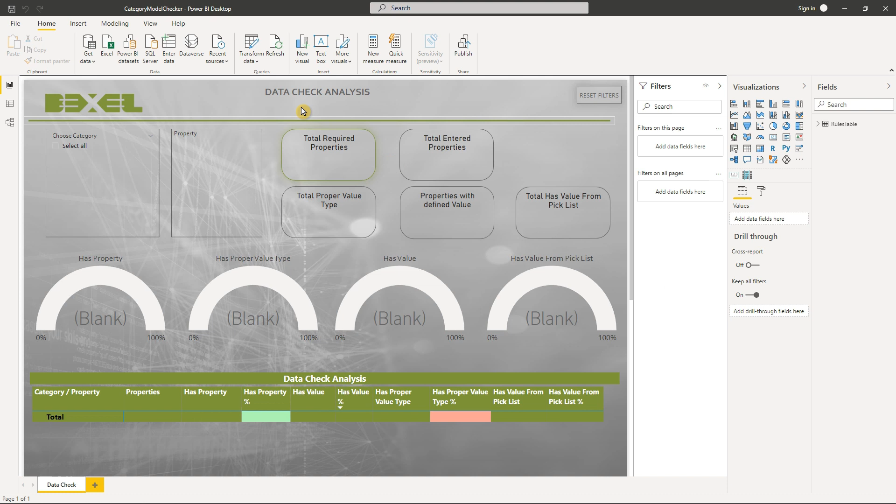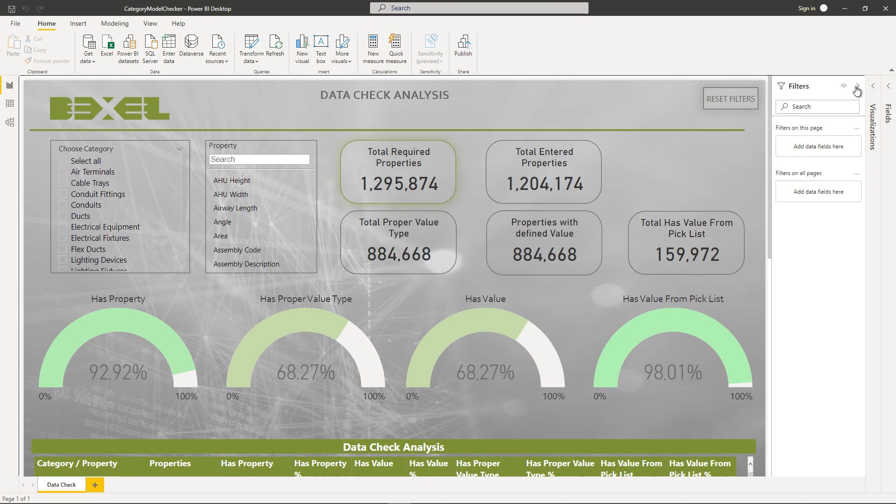It will take a little bit longer than last time, and as you can see, this time we have a much larger amount of performed data checks. We have over one million required properties to check. In this check, we can again select only one category.

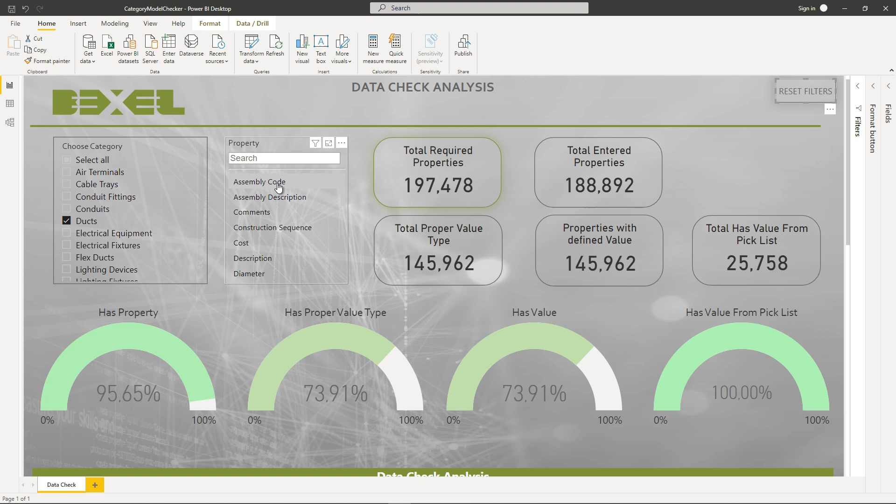In this situation, ducts. We can check the status of the data populated in this category. We can check some other categories as well, or check by a property, for instance assembly code, and see the situation. It seems the property assembly code is properly addressed in the ducts.

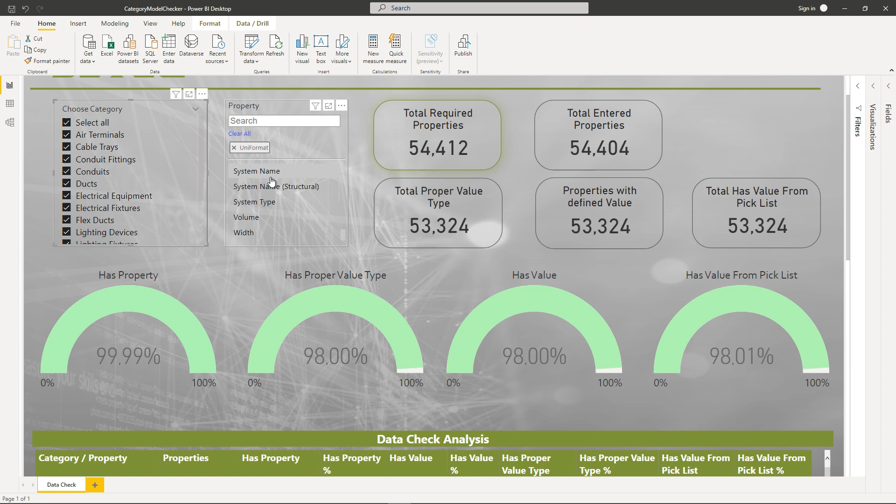Or we can select all properties and all categories and see the situation in this model. So, very practical, very extensive database, organized properly so it can be controlled, easily presented, and give you insight into the status of your model and whether it's ready for the following stages of the project. Besides API add-ins, BEXEL Manager also has validation engines built into software functionalities.

For example, within Cost Editor there's a validation engine to check if there are elements in the model that are not applicable to the cost assignment process. That means such elements, for some reason, don't contain the needed properties or values to be assigned to the cost version. We'll talk more about this process next week during the 5D session, but right now we're going to quickly perform the validation.

You just need to right click on the cost database, go to check applicable elements. You can choose all elements or selected elements in case you want to check just part of the model. If you click, it'll very quickly perform the validation analysis.

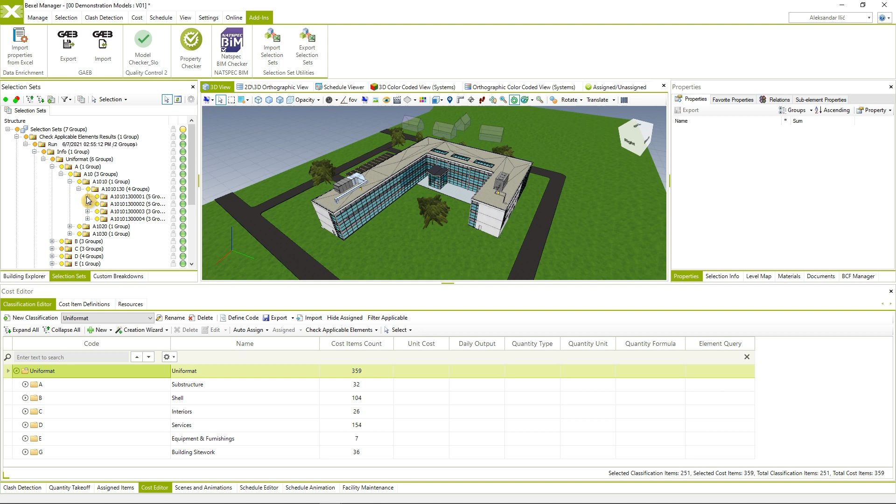If you go to the results, again they're presented in the form of selection sets. You have two main folders. One is the info folder, where you practically get the hierarchy of selection sets reflecting the structure of your cost database, and that will show you which elements are applicable for the cost assignment process.

The other folder is a warning folder, where you'll have all the elements that are not applicable, with a detailed description of what the problem is for the assignment process. In this case, for this group of elements, they're missing the property perimeter, which is probably required in the quantity formula of this cost item.

Besides the automated data validation process we just demonstrated, another important process in BIM is data enrichment. Sometimes a project manager needs to enrich the model with additional properties or modify existing properties, and BEXEL Manager is one of the rare BIM management tools that allows modification of the BIM model data layer. BEXEL Manager also allows for automated data enrichment.

This means that through open API add-ins and API scripts, the user can add properties to model elements based on user-defined rules. In a similar workflow as with model checkers, data enrichment rules are defined through an Excel spreadsheet input imported into the add-in user interface, and the model is enriched based on these rules. Model enrichment rules could also be defined through an API script, so you're not limited to Excel as your input method.

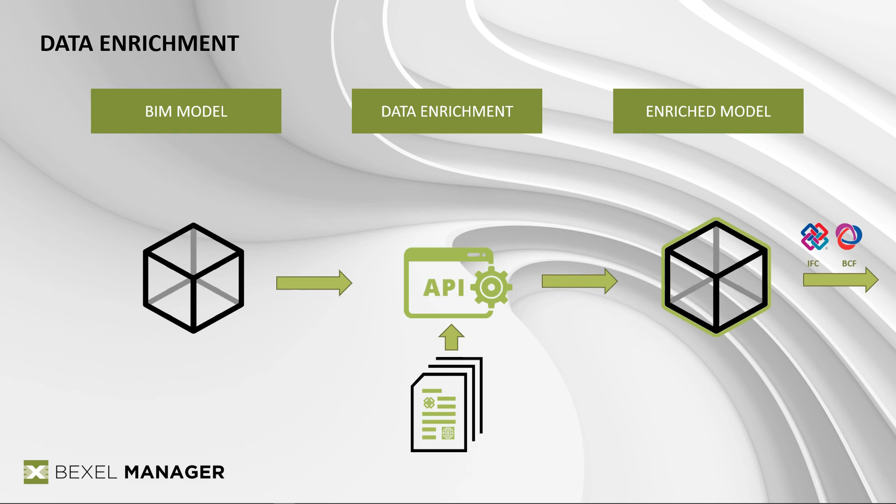To demonstrate this data enrichment process, we're going back to the large-scale sample project we were using for the previous analysis, and we're going to check the status of the elements regarding uniformat and masterformat codes. If we check one of the elements randomly, we'll see there are no uniformat or masterformat codes assigned to these model elements.

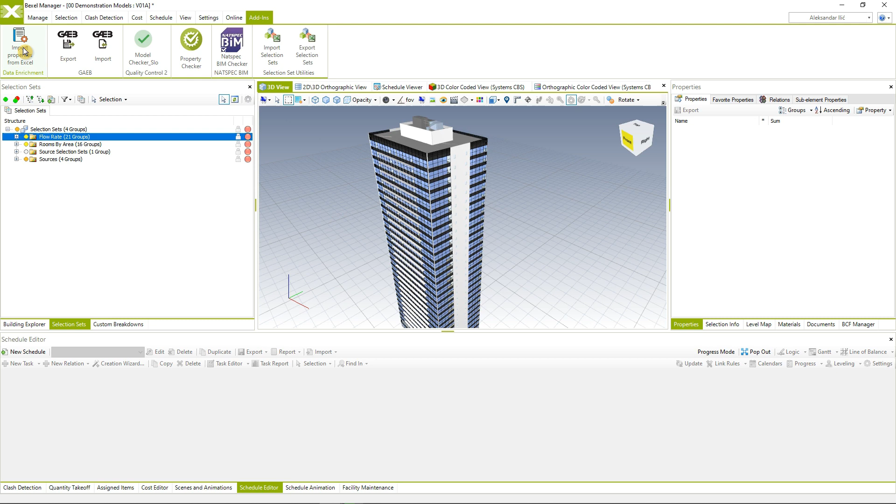We can check another one. Again, nothing. We only have construction sequence, and even that property doesn't have a value defined within it. So the process of data enrichment is pretty simple. We're going to use and import properties from the Excel add-in. We'll start the add-in, and the process is pretty much similar to the model checkers. We're going to find the proper Excel spreadsheet with the populated rules for model data enrichment.

So what we're going to do is open this sample for the master format code enrichment. If we open the table, we'll see that based on the combination of 3 existing properties in the model - the category of the element, the family, and the system name where required - we're going to add a specific master format code.

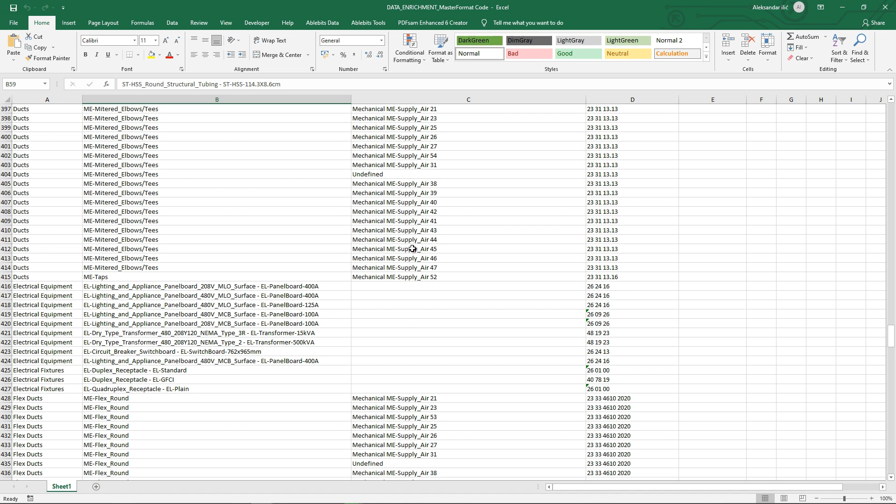So for all elements with this combination of properties, we're going to assign the appropriate master format code. For MEP elements, we also include system name as a distinctive property, because we could have the same types of pipes, the same family, diameter, and even material, related to different MEP systems. For structural and architectural works, we don't have defined systems, so we just use a combination of category and family name.

So if we just go back and click open, the add-in will perform the enrichment process quickly. Of course, as with the model checkers, it depends on the scale of the project and the number of properties to be populated.

But it won't take more than 15-20 seconds. Again, similar to the model checkers, we have a set of selection sets with elements grouped according to the values of the properties that were added. So if we select elements with this code, we can check the properties and see that the master format property is populated and matches the code from the selection set folder.

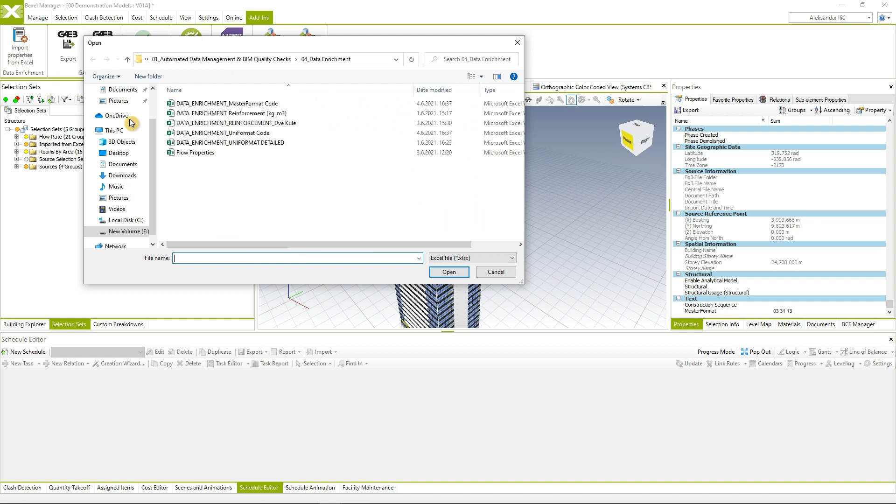And now we're able to do that also for the uniformat code. We're going to use a different input table that will have uniformat codes populated with a specific combination of category, family, and systems.

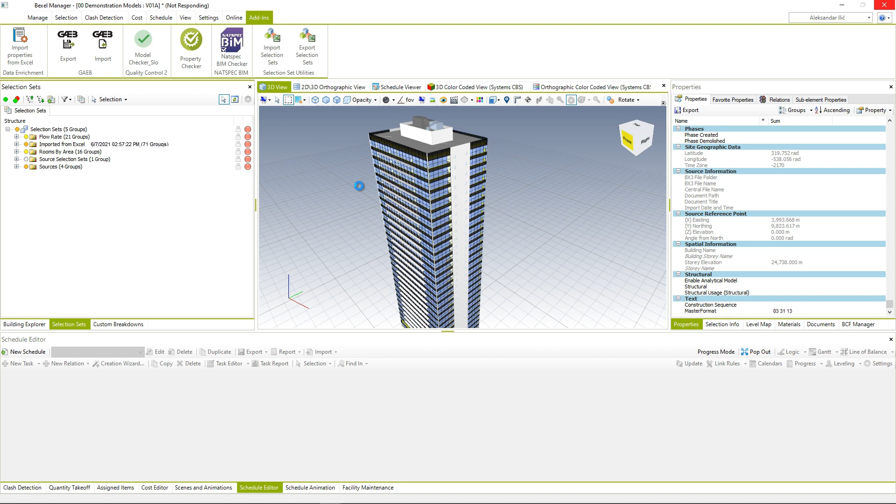So if we click open, again it's going to take some time to import the properties and populate them to all the elements of the model. But once it's completed, we're again able to select the elements based on the properties that were added and check if the properties are actually added.

To utilize the properties added with this data enrichment process, we're going to import a custom breakdown structure that will sort elements according to uniformat and master format code. So we'll use the exchange function, click import, navigate to the proper folder, and import CBS - check custom breakdowns.

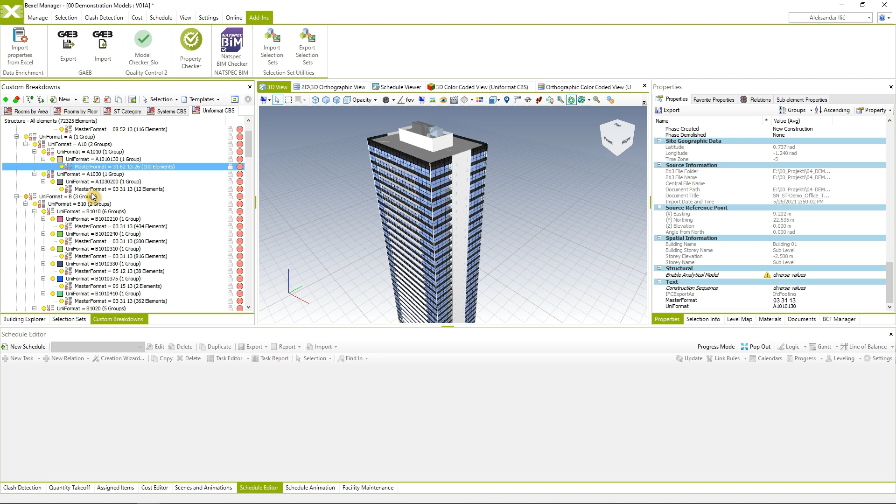So here we have a CBS that organizes all model elements by uniformat, using a substring for the groups of works, and using master format on the lowest level of organization. If we go to the 3D color coded view, we'll see all elements colored according to master format on the third level of organization.

So if we check some group of elements and isolate it, we can see that every group of work is properly colored. So we can check different types of works and organize our project according to the data we populated using an add-in.

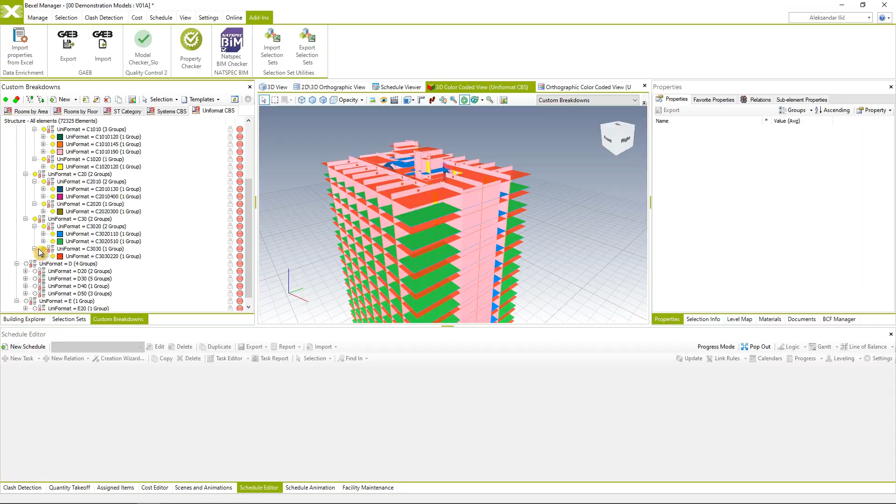And that would be it for today's session when it comes to demonstration of advanced BIM workflows. Now we're moving to the Q&A session for today.